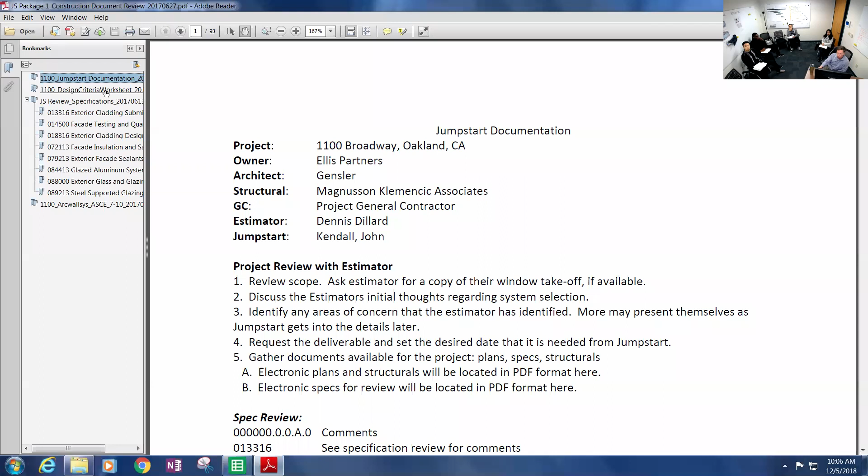And so again, as we look at, if I come back, I think this one I wanted to just go to contract. So again, this form that we fill out here, our design criteria worksheet, where we're coming in and filling this out. A lot of times these may be known or unknown. So I may not know the U factor. Sound transmittance, that's not going to be as critical for us in determining the wind load as is the wind speed, the risk category, exposure, live load deflection. And so let me see if I can find you an example of what RFI 1 looks like. What I might do is this.

Hmm. You have to excuse me for a second here, sorry. Should have had this all set up for me, but I didn't.

No, you know what? I apologize, guys. How do I get to that? Oh my gosh, this doesn't have sales on it. Why is that? Because not everybody has access to that, you see? Oh my gosh, it's terrible.

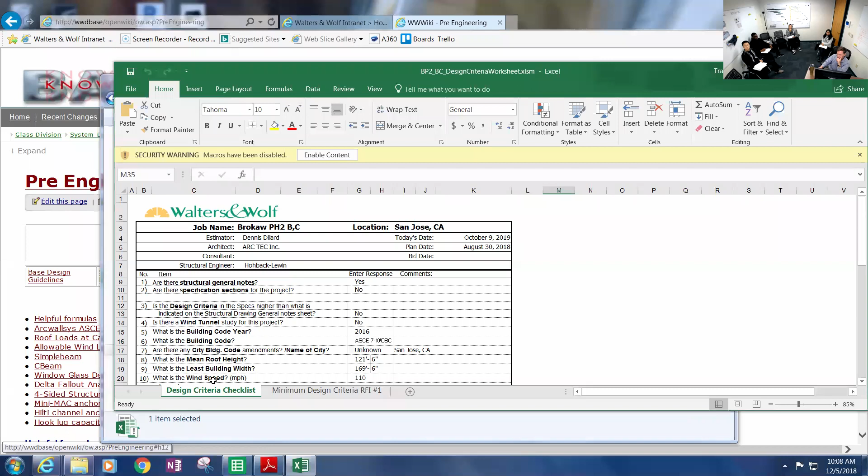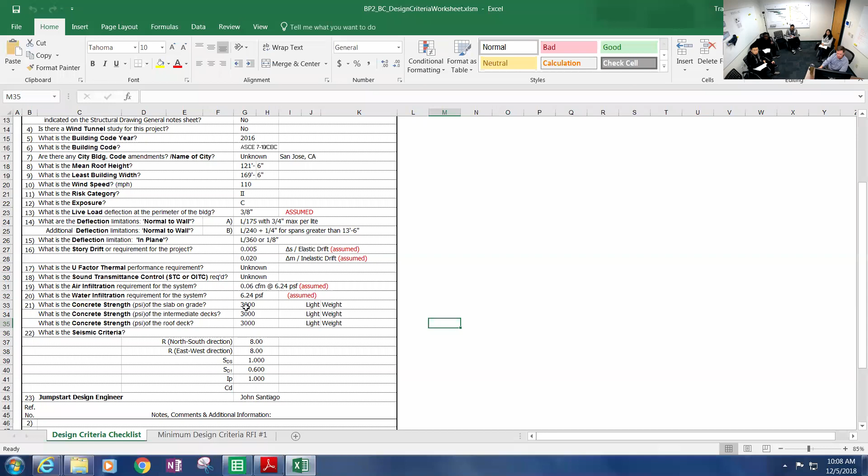So again, here's... I don't even know what that means. So filling these things out, we label things assumed if they're not on the structural general notes or specifications, if we can't find them. And another thing that's important to us is the concrete strength and the weight of the concrete, if it's normal weight or lightweight.

Normal weight is stronger. Lightweight actually has better fire protection floor to floor. So a lot of structural engineers and contractors prefer lightweight because it has better fire protection floor to floor. Something about whatever's in the concrete, but structurally, it's weaker when it comes to our embeds and things like that. So there's pluses and there's minuses. And they usually like their pluses and don't care about our minuses.

So what we've done is we've created a second page behind this where all that data we're filling in automatically fills in for us. And so this is what the minimum design criteria looks like. It's a confirmation, because we're basing all of our engineering and design on this information.

Years and years ago, before we started doing this, we would go through and do all our stuff. And then when we finally start doing calcs, it's like, oh, but the design criteria is different than what you guys thought. How silly is that? Stupid of us, really. So this is just our first RFI that the PM submits on every job.

So again, just confirming the design criteria: the wind speed, exposure, risk category, code, the deflections we're looking at, and some seismic criteria that our structural engineers use. We're trying to fill in what we know and leave blank what we don't know. So our assumptions, and then we hope they're filling this in and confirming what we're writing in there as well.

And then again, the weight of the concrete, the strength of the concrete for our embeds and anchorages, seismic drift, the drift movements the system's going to be seeing, and then the wind speed criteria. And this is just a little chart we made over here that sometimes we can use to help fill this in automatically, but it doesn't show up. So the actual PDF is just this sheet over here.

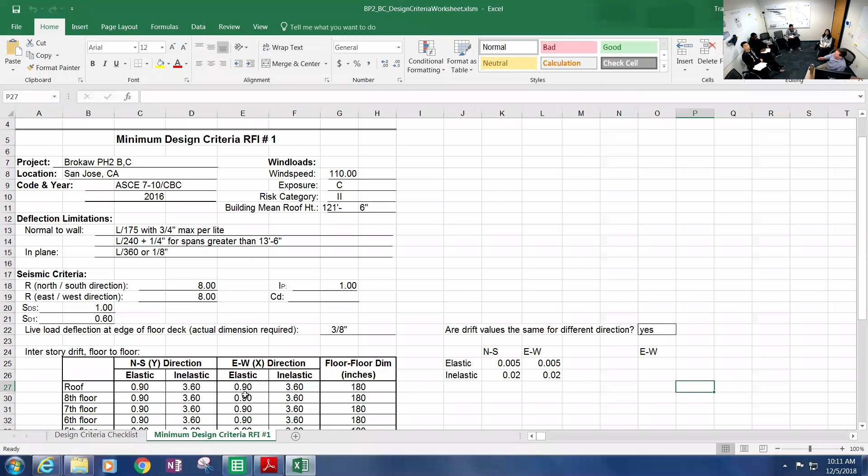Because to them, it's just a bunch of numbers. They'd just send it in blank if they could. But the challenge there is then we get back information that's really wrong. So it's, okay, here's the assumptions we made, confirm this is right or not, as opposed to just sending it in blank. Because for them, I sent it in, sure. But you're not helping anyone. You're hurting us if we don't ensure that.

So for Jumpstart, the timing is right after we get the job. It's a week, a couple of weeks, but it's before shop drawings. It's truly the very first thing that usually gets submitted. That's why we call it RFI 1. Typically, but depending on the PM schedule, it may be the third one they submit, or who knows.

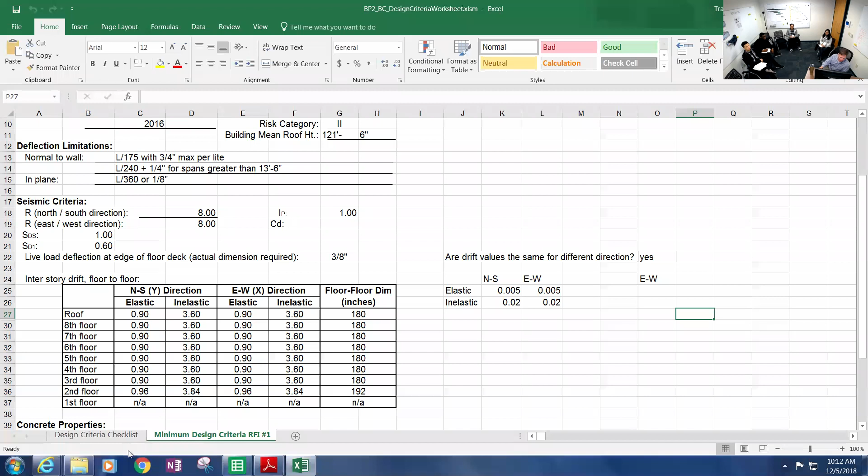So it could be RFI 3, but the title of RFI 3 is RFI number 1. So if we went over here to the portal, we can go in and look at the PM dashboard. Let's look at that. So if we go to RFI, it's right there.

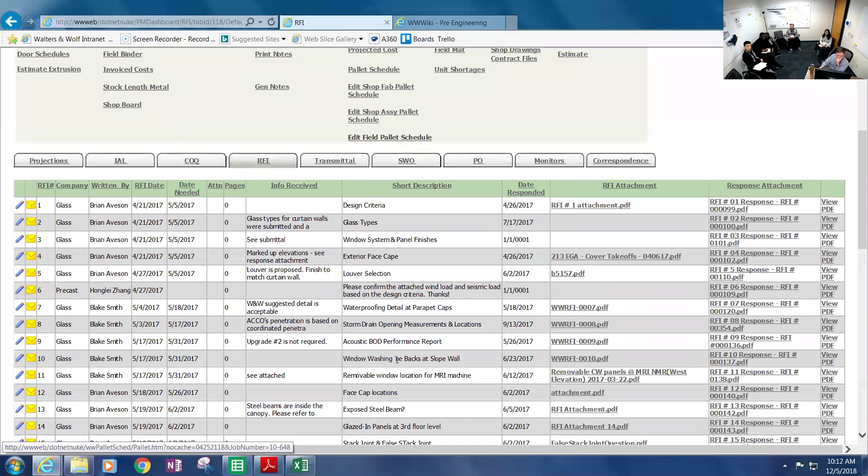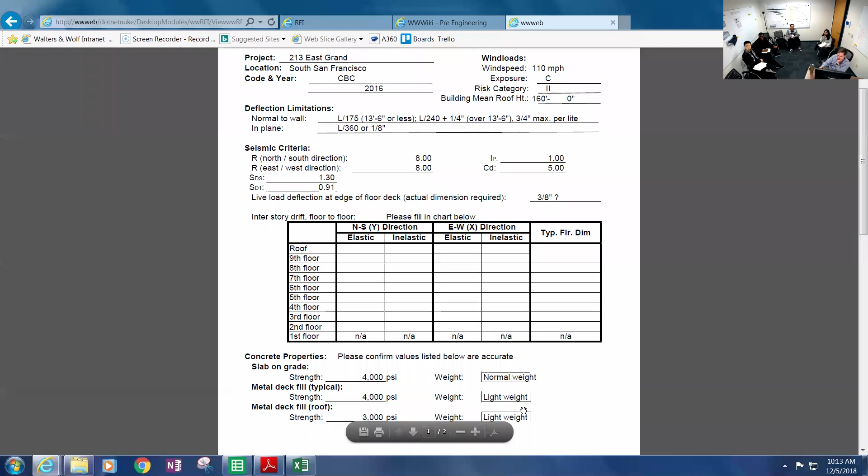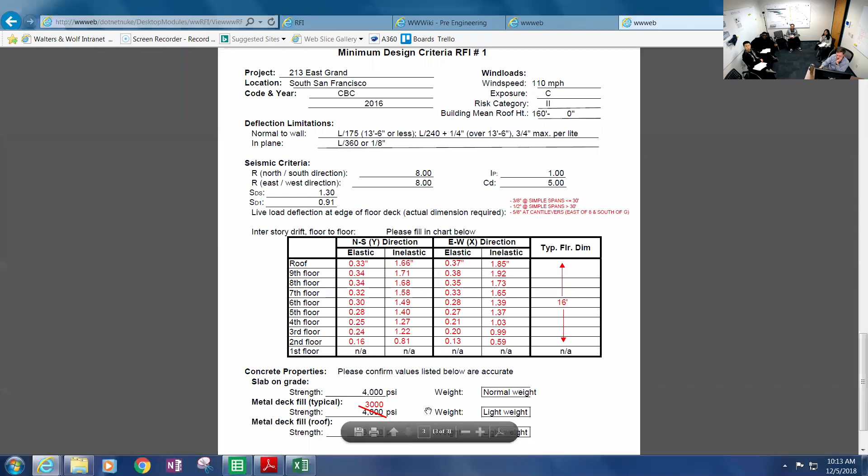And so if we go back here, let's see what the response came back. See how well we did. So they've given us all the seismic criteria. Oops, they said we had the strength of the concrete wrong at the intermediate floors. It looks like the weight was right. And then live load, they came back and defined, okay, there's actually multiple different live loads.

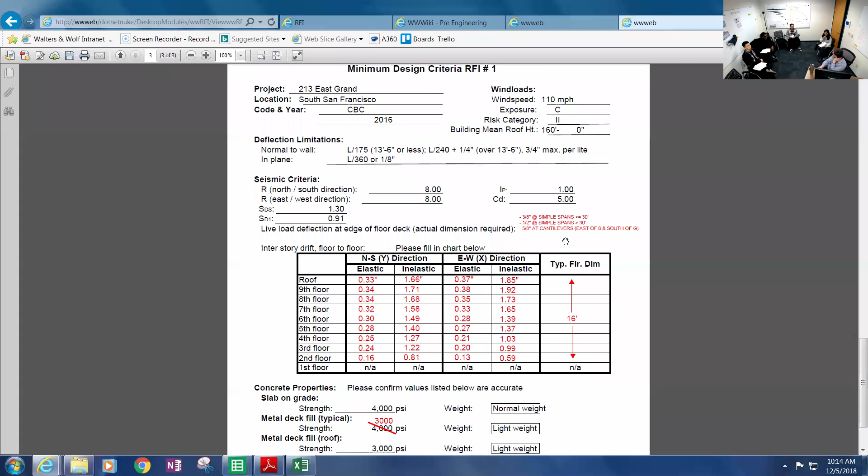And unfortunately for them, but fortunately for us, we just picked the worst. Because there's different parts and pieces, for us to try to combine and isolate certain parts and pieces for the live load, it's really our stack joint. We're just gonna use the same stack joint everywhere. And so we did have to create one for 5/8. So we designed for the worst case. Typically, yeah, in that case.

This is a good example. This is what we want. We want a response back, filling in all the blanks and correcting anything that we may have had. Exactly, it's a great example, because sometimes you go back and it's only halfway there, and then you see something else. It's like, oh, come on. All right. So that's design criteria, or RFI 1. Any questions on RFI 1?

So that's between Jumpstart and PM, right? Yeah, so the PM submits all RFIs, typically. If it's a sales time, the estimators will submit RFIs for pre-bid information. So it's either the estimator or the PMs that are typically the ones submitting those. Drafting doesn't really submit RFIs.

They may be involved as far as giving the details or the sketches to the PM, because it's usually the PM and the draftsman discussing that. Here's what I'm looking for, I can't find it. And the PM goes, okay, well, I can't see it either, so we'll have to do an RFI to get that information for you.

Okay, so the next thing was basic structural design. So since you're here, how high level or low level? Well, you could take 3 hours. No, 30 minutes, basic, just like a nice overview of, in the simplest terms, what do we design, how do we design, maybe even the I values. So how you come up with the shapes. Okay, so we touched on that a little bit yesterday.

On structural design, when we talked about package 2 in our pre-engineering, I opened up that pre-engineering package and showed you the results of the C-beam and the different things like that. You guys probably know more about engineering than I do, I'm guessing, I'm hoping. Well, not designing a curtain wall. Well, not designing the curtain wall, but as far as engineering, and knowing that

the size or the configuration of a shape affects its strength. So the deeper something is, or the wider, the more flanges. It's like I-beams, tubes, angles, just structural properties, right? So again, it's the section properties of shapes that we're looking at.

Wow, that was really slow. Oh, that's not good.

Oh my God. I forget those all the time too. I know.

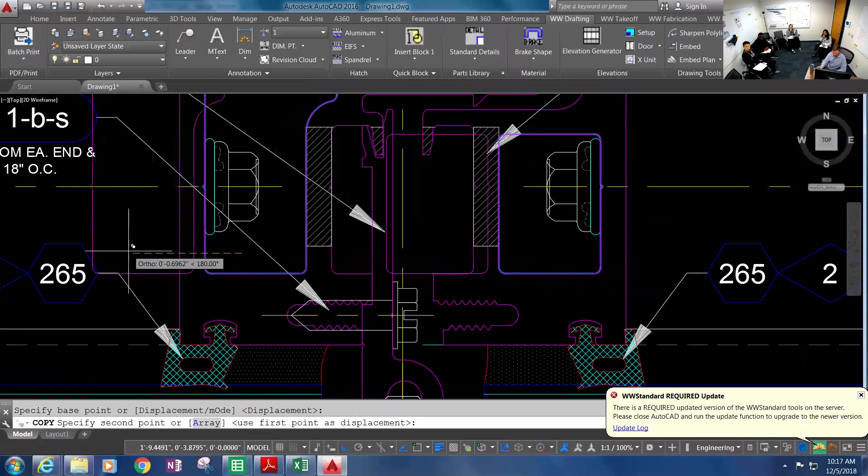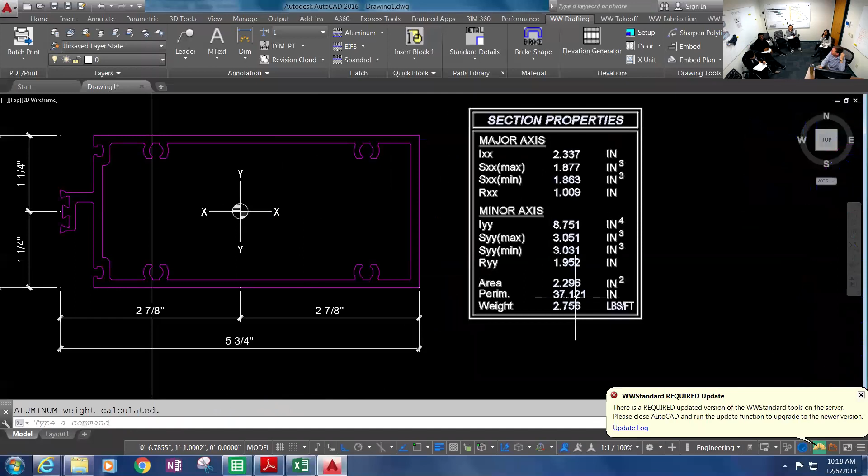So we've got a little tool that we created called SecProp that will give you the section properties of shapes. And so when we go to our engineering, that's really what we're looking at, right? Is the I values for deflection. And so in our split vertical mullions, it's additive. So we just add up the IXX here with the IXX here.

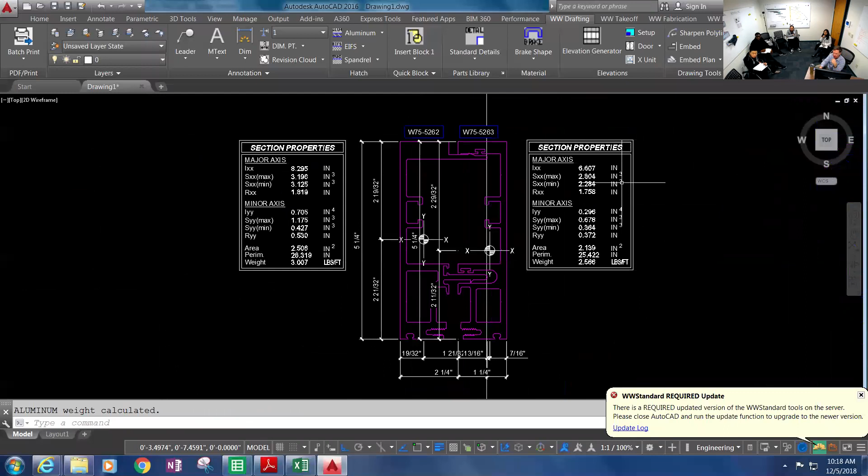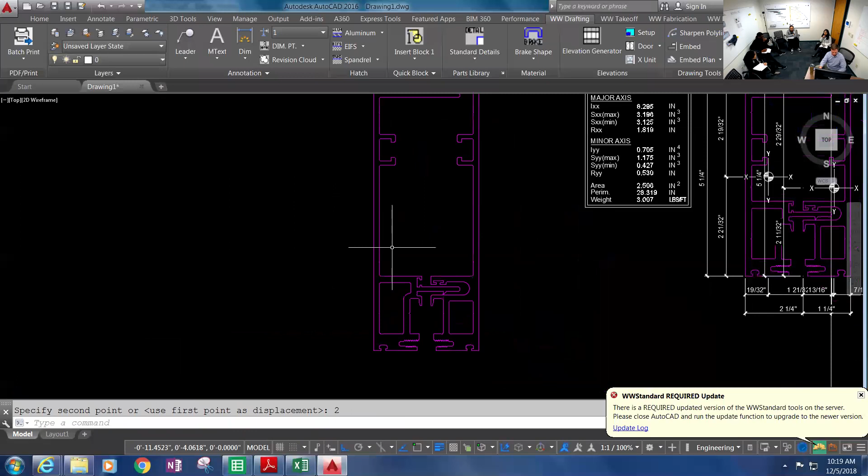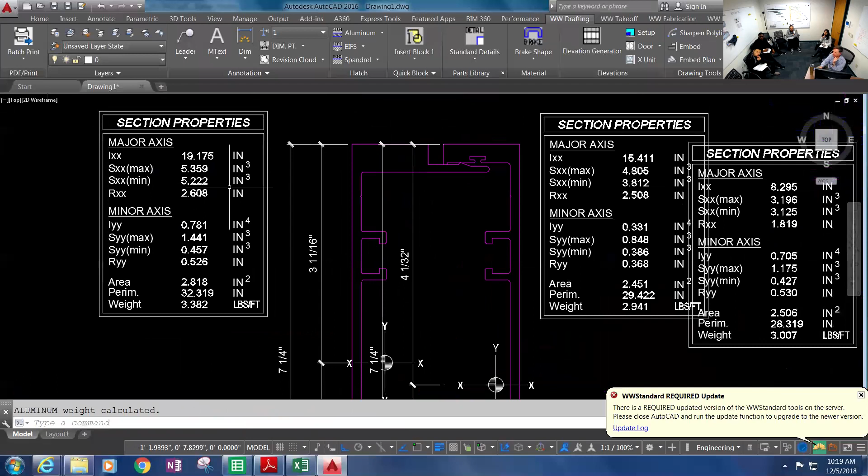And sort of like I mentioned, as the shapes get deeper, they get stronger, right? So if we have higher spans and things like that, just by making it 2 inches longer, the I value went from 8 to 19. So again, that's probably stuff you guys already know. The shape affects the properties or the strength.

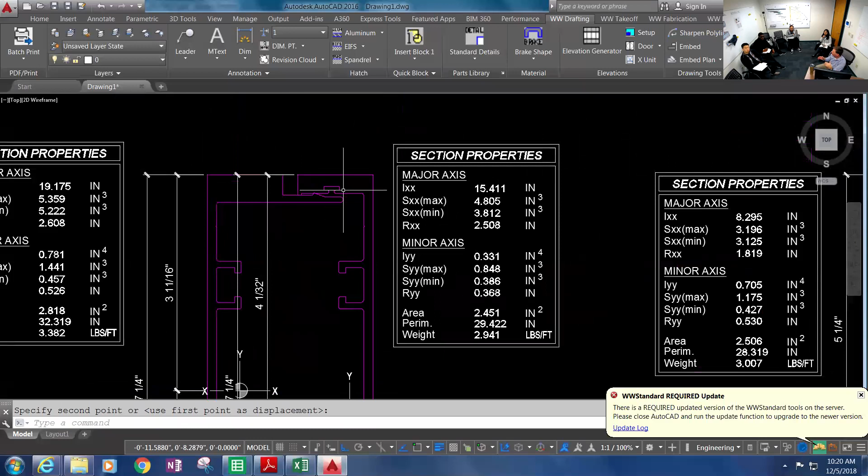Just like an I-beam, it's really the thicknesses of the ends of the element. So this area here and this area back here, getting thicker or thinner, and then getting them farther apart. And if I come in and try to add metal in here, which we've tried in the past, it doesn't really do us as much good in the middle of the shape. It's really at the outermost webs, and then getting them farther apart.

And so for vertical mullions, that's really just wind load deflection on the mullions that we're looking at. And then horizontally, we check for dead load deflection of the glass. Typically horizontals, maybe you're spanning 5 feet, maybe 6, 7, maybe even 10 feet if it gets really crazy. But mullions are typically 13 feet to 16 to 18 feet because you're going floor to floor. So your mullions are almost always what you're checking. We really never check horizontals for wind load.

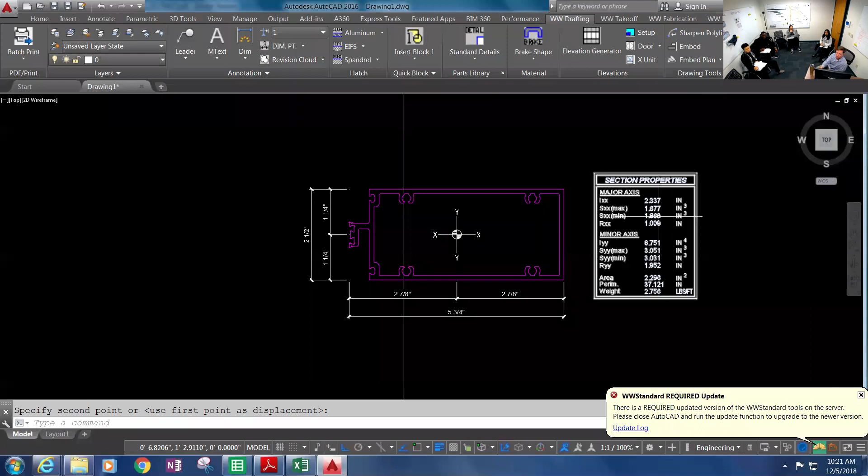What usually affects the horizontal the most is the dead load of the glass. As it gets wider, it wants to bow in the middle because the weight of the glass is at the quarter points. And so this smaller number in the horizontal is what we actually are checking for dead load. So in this horizontal it's the 2.337, not the 8.751. The 8.751 is the strength in the wind load.

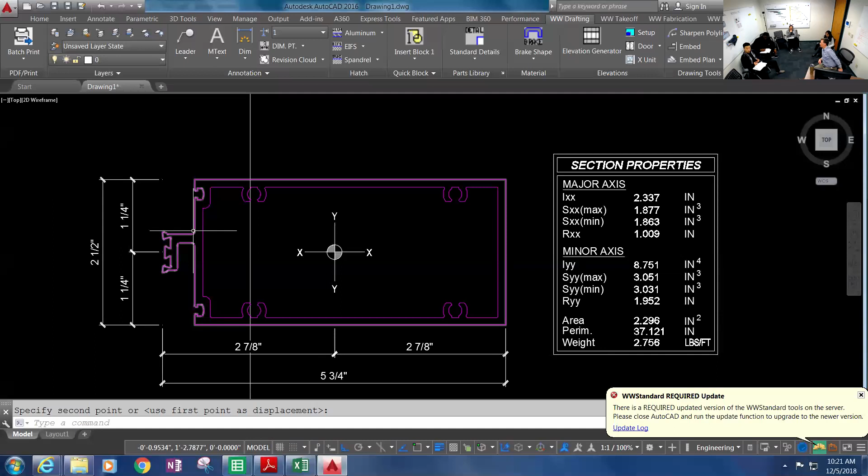And so, go ahead, Michael. I just had a quick question. What's the command you use to get the section properties? Okay, it's SecProp. So SecProp.

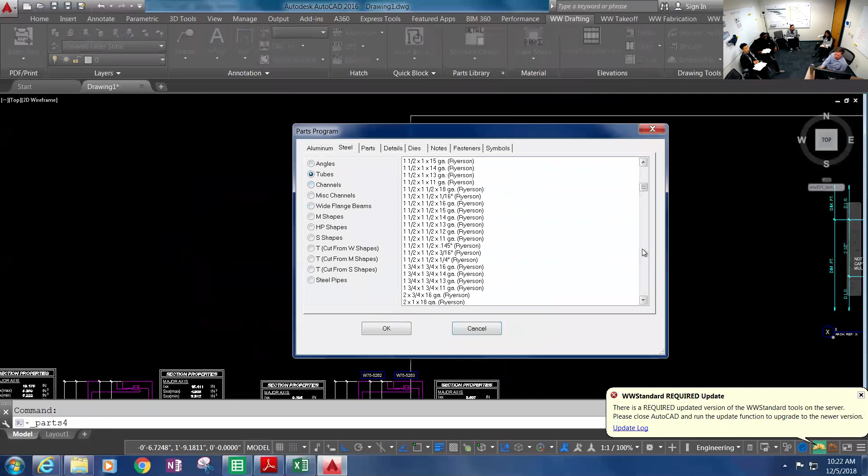Do you have a tool to check the horizontal deflection when you get wider? Yeah, there's an engineering tool that creates that, but I think Jumpstart's the only people that have it. But we do check that when you get to openings bigger than like 5-6 feet or something, right? Yes, correct.

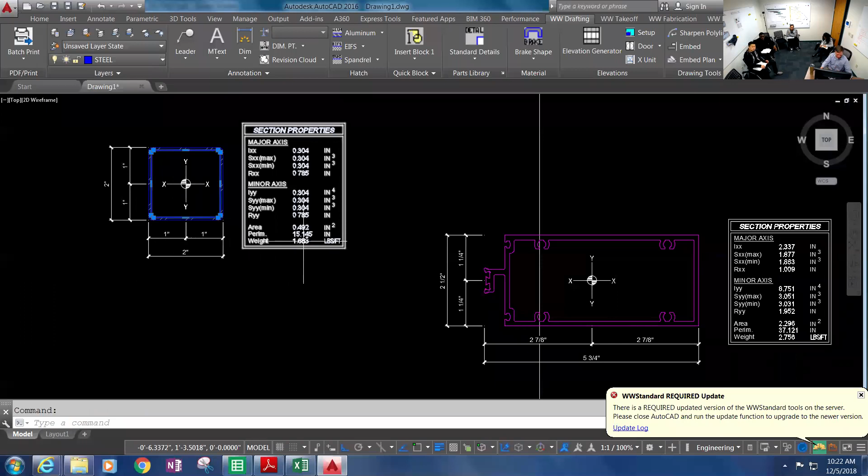And then just as an FYI, the section properties for aluminum or for steel are the same. This program is written so that depending on what layer it's on, if it's on the aluminum layer, it will give you the weight of aluminum. But if it's on the steel layer, which this one is, it will give you the weight of steel. Oh, I didn't know that. But it's only the weight that changes. The actual section properties are still the same. You just have to multiply the I value by 2.9.

And then one thing that we look at on the structural side of engineering is that steel is 2.9 times stronger than aluminum. So when we go to look at the reinforcing of vertical mullions, this I value here of .304, we get to multiply that by 2.9. So really what we're doing is bringing that I value up to its aluminum equivalent.

If the program did it the other way and understood that it's steel, it would be just this number. But if we're trying to convert it to aluminum, we would need to multiply by 2.9.

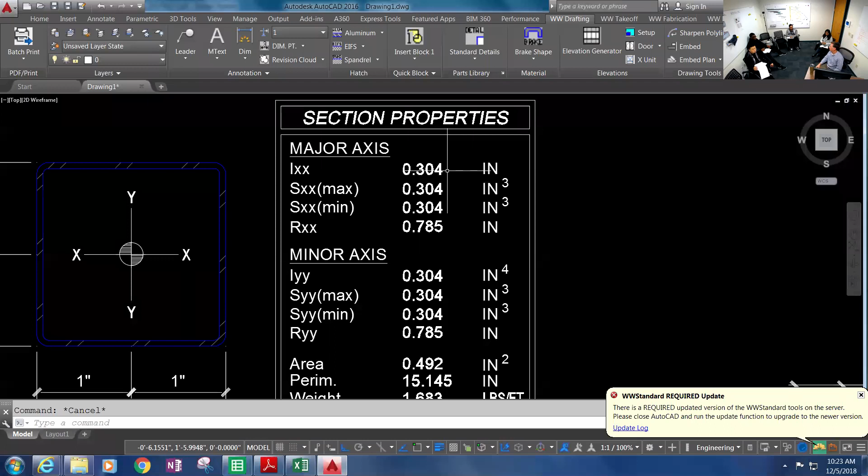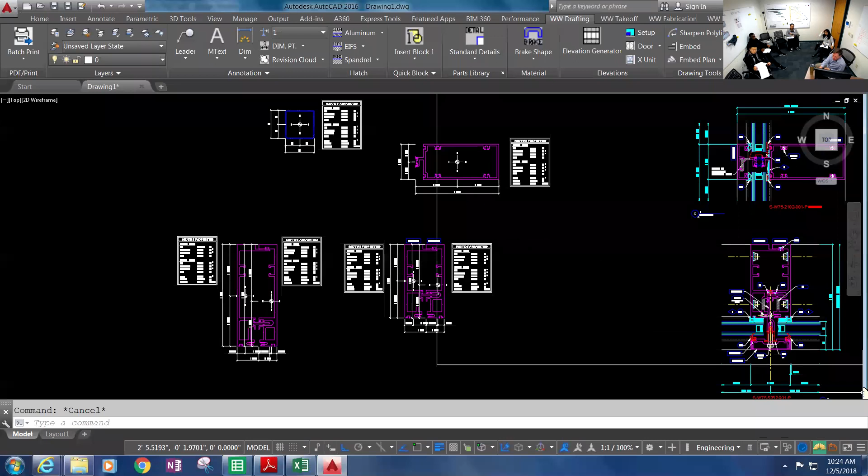Just to clarify the term reinforcing: like we said, if by chance structurally the mullion doesn't calculate, we add steel members inside to reinforce it, to try to help it meet that design criteria before having to stretch it and make it visually different than what the architect may have specified, right? Right. So stretching it is kind of like the last resort.

Yes. If the architect specified they want a 7.5 system, but it doesn't work structurally, then we have to start introducing deeper systems and other things. Yeah, and typically the reinforcing is localized, say the corner zones where the wind loads are higher. Like we talked about yesterday, the wind loads coming off the corner of the building, the little vortex it creates.

Or did we or no? Yeah, you did, when you were talking about package 2. Okay, good. Because I talked about it with someone else yesterday too, and I was drawing a sketch, and I go, "Was that with these guys? Was that with that other guy?" Because I can talk about it again if you need us to.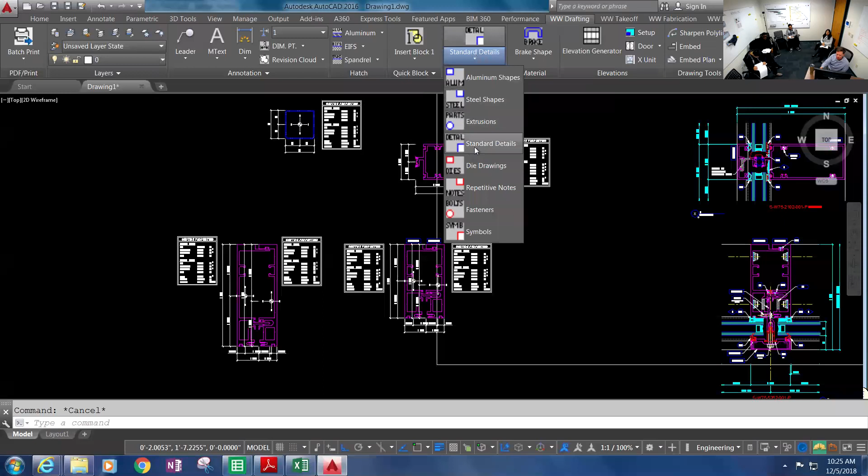Yeah, and so, as I mentioned with the standard detail for the reinforcing, we have some standard reinforcing that we like to use, just to make it easier for us. So there's a detail already drawn with the reinforcing in it. Typically we start off with a 3/4 inch thick by 2.5 inch steel bar, 10 foot long, centered in the span. If that doesn't work, our second one's 1.25 inches by 2.5.

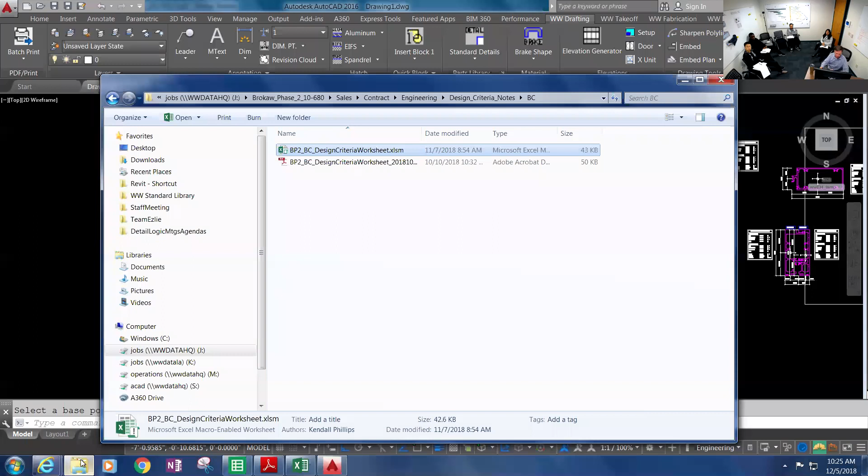If that doesn't work, we're sort of in trouble. I mean, I could get 1.5 inches, another 1/4 inch in there, which we've done before, but we really are trying to get those two to work when possible. And so we'll look at it again real quick too. But again, that's what we're checking in here, right?

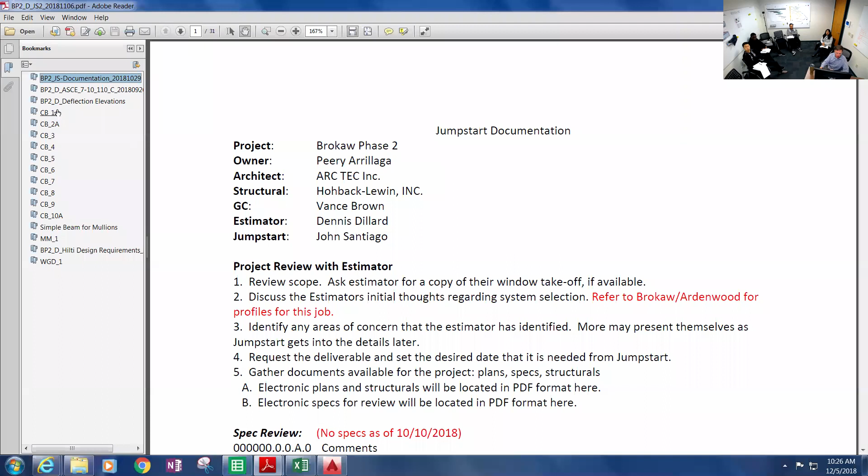So our deflection. I think we looked at 1100 Broadway yesterday, but this would be an example where we needed that steel bar at this location for reinforcing because it's a higher floor to floor at the ground floor. And as I mentioned yesterday, we don't just say here it is and leave it to the estimator or the draftsman to find it. We try to indicate it's needed in these 12 spots, and indicate it on here as well. And so that was CB10.

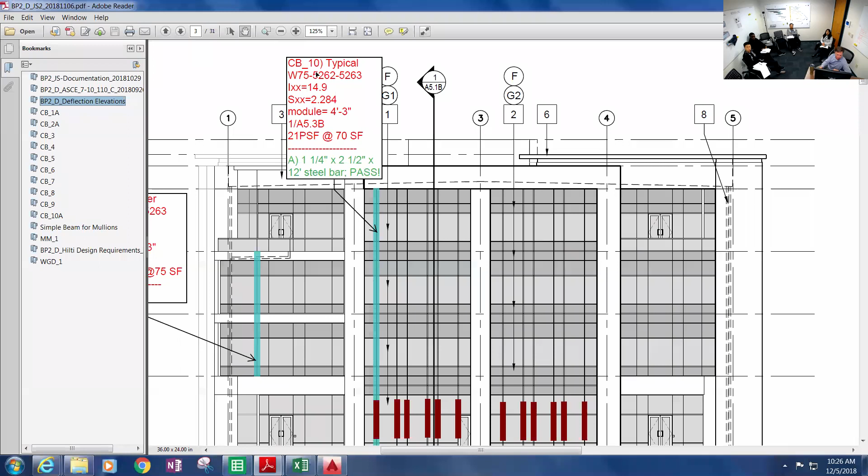And here is where we've added the reinforcing into our CB program, doing the analysis and figuring it out. And in these locations here, we had to add a kicker actually, so that's what these little round dots are. If we look at CB1A in the corner zones and even in the typical zone, how that looks is just another anchor symbol. So here's my typical ground floor anchor, floor anchor, floor anchor, floor anchor, and then this anchor here is 4 feet below the floor.

So a kicker is just another intermediate anchor to help with the deflection, because I couldn't get enough steel in the system to meet the deflection limitations. That's when we had to add the kicker. It's an option we can use sometimes when we have spandrel areas, even if it's vision. They don't like it in the vision. I don't like it in the vision because you see it.

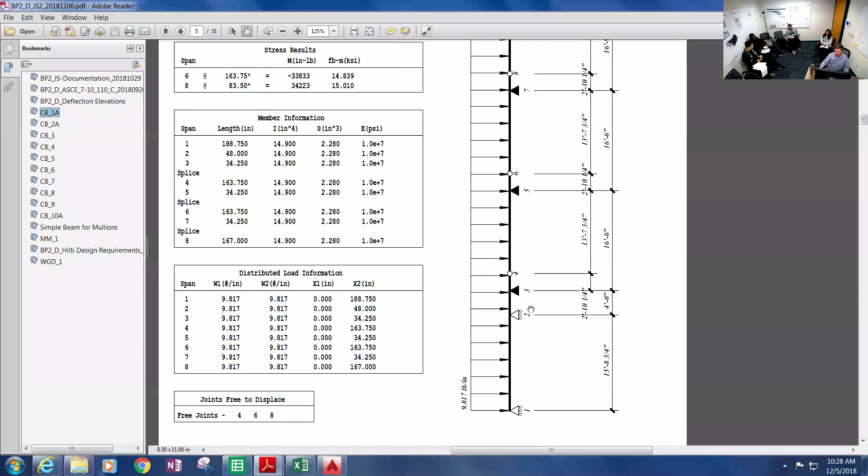But we don't know what type of anchor is required. We just know we need an additional anchor. At this point, yeah. So that's not designing the anchor, exactly. And again, this sheet gives the loads required at that anchor point as well, as far as the reactions.

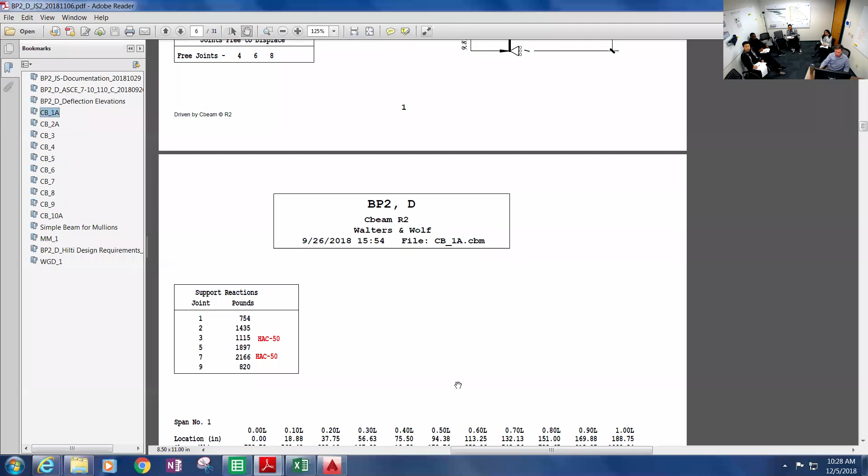It doesn't look like we did it here. As far as checking the horizontal deflection, typically for 5 foot or less, we're not going to have any issues with horizontal deflection from the dead load of the glass. It would have to be really tall lights of glass. And even then, once we put the setting blocks at quarter points, at 5 feet, you're pretty stout horizontally. So we don't usually check that if it's 5 feet or less.

Unless it was really tall, and even then, once we check it, it's like, yeah, okay, it's fine. So that's just sort of historical knowledge, I guess. But once we start getting wider than that, 6, 7 feet, we start seeing that deflection if it's really tall lights of glass. So.

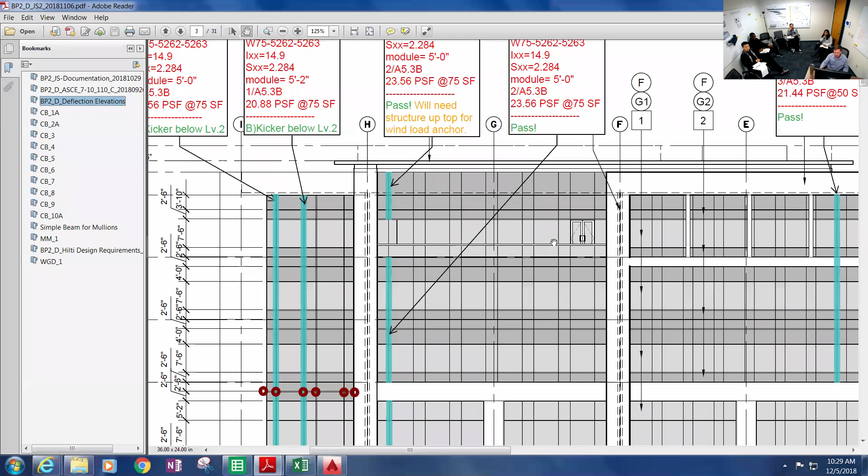Okay, let's see here. RainScreen. So the RainScreen principle, let's see if we can find some. The RainScreen principle has been around for a really long time, because essentially roofs are rain screens with shingles or siding where they overlap. And so again, you're screening the water away from the water line.

Like in my house, if I go in my garage or go up in the attic and I look through, I can see daylight. I can see little pinpricks and pinholes. So my little concrete tiles, they're not caulked together. They're not creating a water barrier where water can come through the holes. And so what the RainScreen principle is doing is it's trying to equalize the pressure from, let's say, outside of whatever the element is and the inside of the element.

Because water goes where air goes, and the air moves from high pressure to low pressure, right? And so typically, the pressure on the outside of the building, did I say it right? Where's your low to high? But it's high. Air moves through our system, right? And so as the air is moving through, if you put water on it, that's where the water's going to go also.

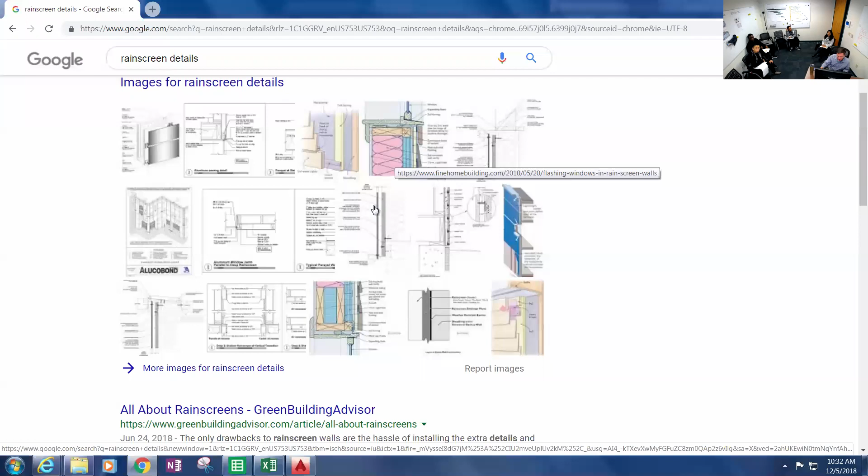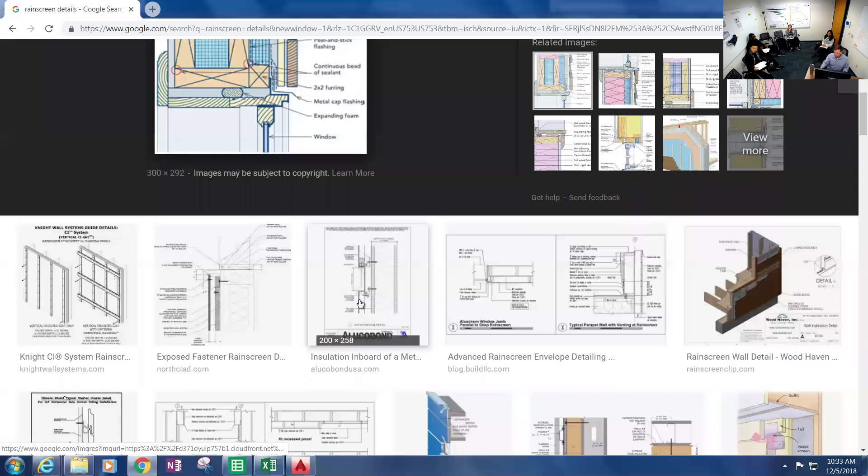Let's see if we can find it. Oh, that's not a bad example, but let's see. Might even just go to our shop drawings and find an example. But there's one right there. Let's see. Is it gonna let me look at that?

So this example here of this stone or terracotta tile right here, actually this is wood, but you can imagine that's any other material. So on this back line of the sheet of the gypboard would be an air or water membrane. And so the water line of the building is back here, let's say. So this surface, this is air, right?

This air pressure in here and this air pressure out here is the same, because these little clips are just maybe 2 inches long every so often. So air is free to circulate in and around those shapes and through those shapes. So I've got no pressure differential behind and in front of that. So any water that hits this, instead of wanting to be sucked through, it just wants to drain off, because there's no air pressure trying to pull the water through.

And so then the same thing can be applied to curtain walls. It can be applied to any system, right? So here what you're doing is any air pressure here, it's the same. So water just wants to drain down. Incidental moisture in the air and things like that may come in here, and that's where the vapor barrier in the back prevents that from coming in.

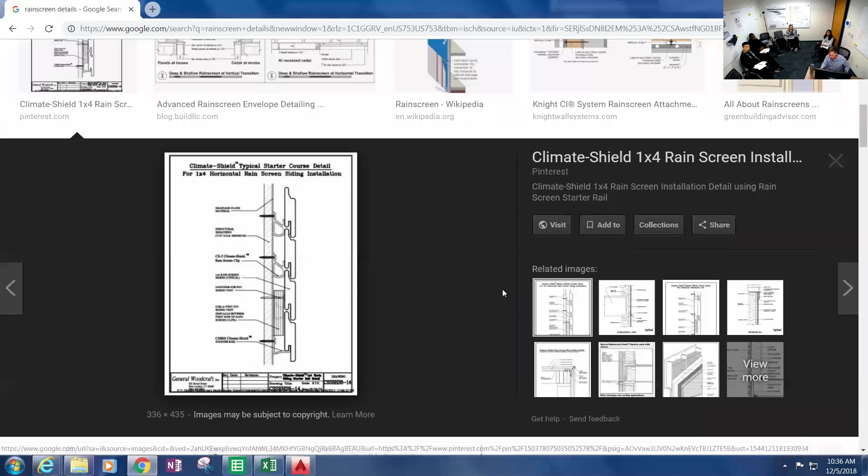And then this material can be anything. So like in this example, this is a wood siding, I'm guessing because it says woodcraft down here. But this could be metal panels, it could be terracotta tile, which is a type of brick or clay that comes in a siding thing like this. It could be almost any element that you want. It could be metal, just overlapping, things like that. What we're tending to see, let's look at this one right here, maybe.

And Ezzy, I don't know if I'm going too deep or too shallow. Ezzy's going, shut up, Kendall, and talk about something else. This is all good stuff, though. No, it's good. Let me, what I'm going to do, I'm going to go back here.

So the reason to understand this, too, is most people just think the exterior thing you see on the building, that's where you're stopping the water. But as we just saw, we're allowing, so to speak, water within that detail we looked at, maybe 1.5 inches, it's open. So like I said, the water line is really that barrier. So when we are working out our details later, we'll see where's the water line, which is where we need to actually stop the water, where we need to seal and put the sealant.

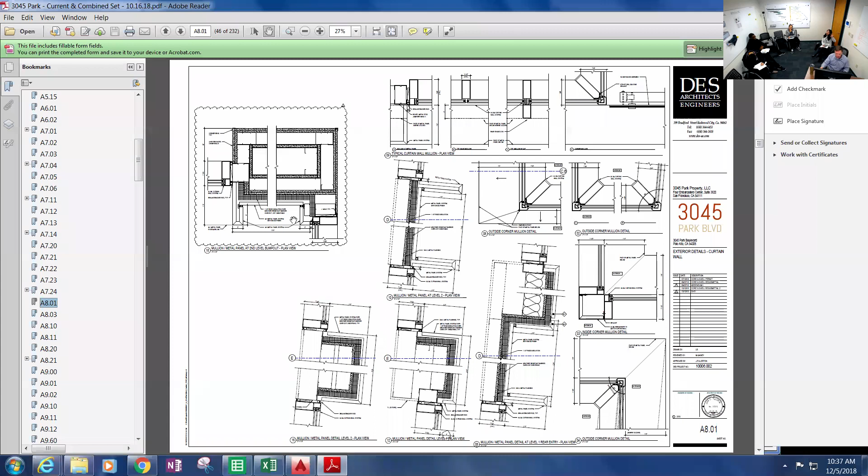We can allow water in a certain space, as Ken will show you in our details, where we allow water to go, and air, but where we have to stop it, there is a point. So it just kind of ties into understanding. You don't need to know every other substrate's details, but it's one of those questions as we're detailing: what's the water line of that system that we're butting up to? It's not always the same. Terracotta, stone, precast, they all have different water lines. So it's just good to understand their stuff enough to know where we need to stop the water and then understand our water lines in the curtain wall.

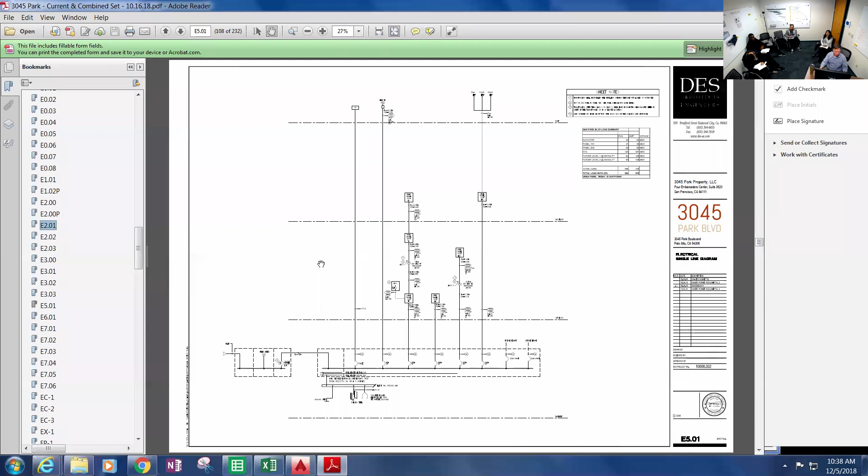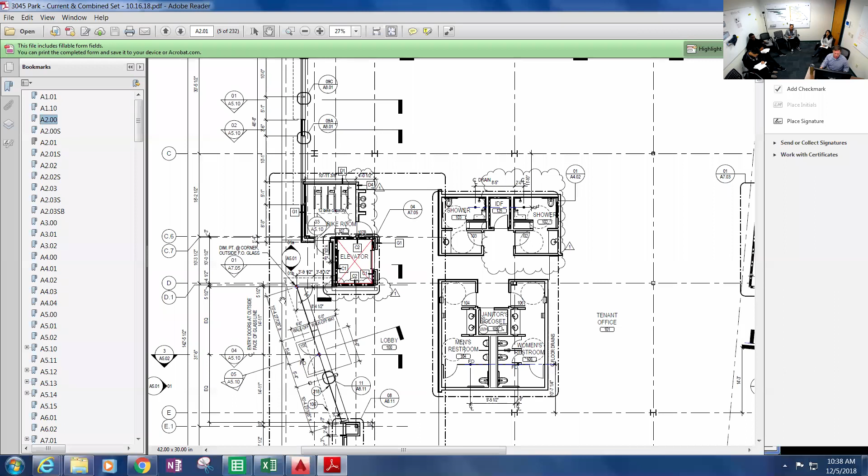Right. Yeah, and so one of the current jobs, well, a lot of the jobs have this, but one specifically is 3045 Park. And so this detail here is a vertical cut through. Let me just show the elevation first. Electrical, how did I get to the electrical? So this is the plan view, and what we're gonna be looking at is a detail of a column. It's gonna be similar to this little vertical column cover here, and then elevation.

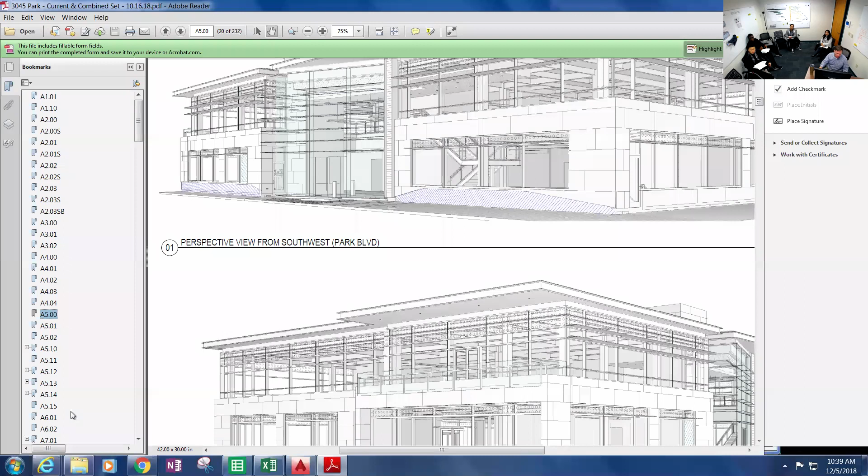Oh, that would have been a good sheet, yeah. So this is all metal panel right here, and here's our little windows, and these metal panels are a RainScreen panel system. So again, the water's hitting it, shedding off, but it's not the true water line of the building. The water line of the building's behind it. And if I can find my detail again.

So then looking at a plan view of that. So we've got a window. A little bit, please. Thank you. Yeah, that's good. I've got a window. Here, get rid of this.

It's all right. It's all okay.

Right. So again, I've got a window system over here. Here's my glass inside. Here's my window over here, my glass. So this is an open joint panel system. And the actual water line is this hidden line back here. This little hidden line here. So this is the water vapor barrier.

And so this started in Europe actually before it got to us, and then it was really on the East Coast before it even got out to here, because it never rains in California. Well, it's raining now, but it doesn't rain. It's not like the East Coast, and it's not like Europe. And in the Bay Area especially, we don't have quite the swings in temperature that the East Coast has and even Europe.

So the Europeans, and now we do, this crosshatch thing here is insulation. So they'll actually come in, they put down the water line, and then they cover that with insulation. So they've sort of got a secondary element shielding water from getting back to the actual water line itself.

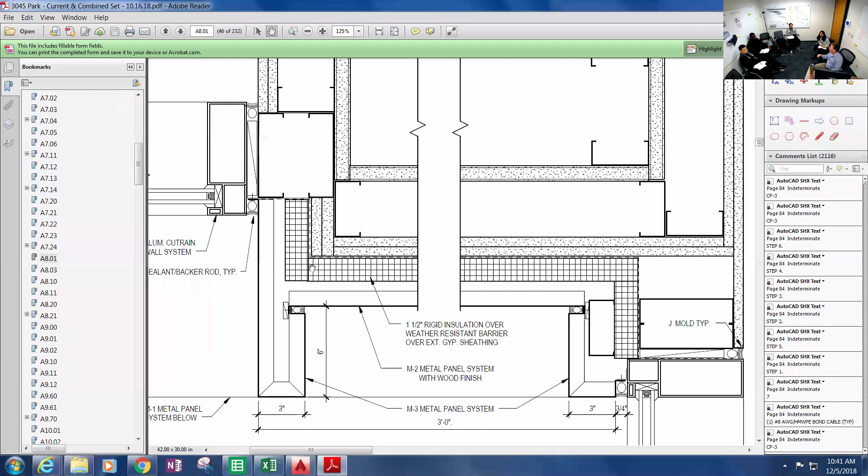Because a lot of times the architect will want us to go ahead and caulk it up. And it's like, you could, but now you're trapping water, you're making a fish bowl. Yeah, they show the caulking there, they're not showing it as open joint. So just something to be aware of as you're looking at the details, if it's open joint or if it's not open joint.

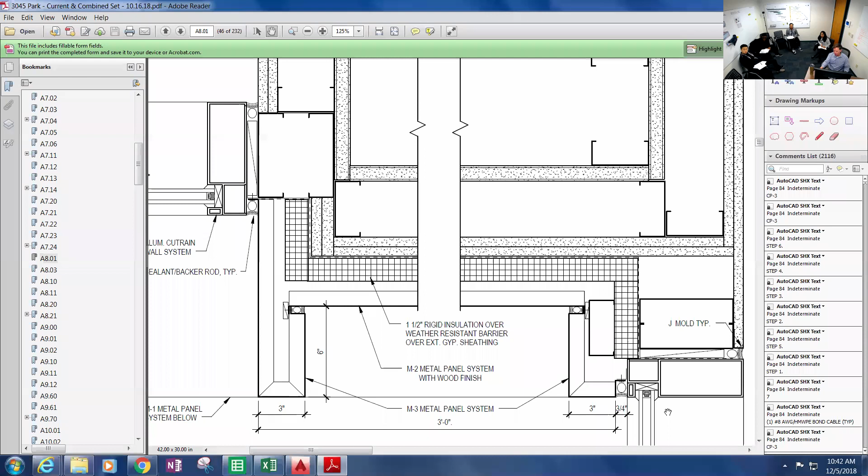And as we mentioned here, the importance of knowing this is, if this is the true water line, that hidden line, then my window system needs to caulk to that. So right now, they don't have us caulking to that. They've got us caulking out here in the face, which is not the water line. It could be if they wanted a face sealed system, then we could caulk out there and that'd be fine.

So in the proposal details, hopefully we're catching this and drawing, okay, there needs to be a little piece of flashing here for us to caulk to, even though the architect didn't show it. So for us, we need to understand how we're caulking our system. We could still put the sealant where they show it, and that would just be called a beauty seal. It's just for looks. That's not really waterproofing the system. The one behind that's gonna be hidden is really the water line caulking the system.

And the other aspect is that typically that waterline product is not silicone compatible, and all of our sealants are silicone. So we'll either have to put a piece of metal flashing or maybe a piece of foil face tape. It looks like a roll of duct tape, but it's got a thin layer of aluminum foil coated to it. That tape will adhere to the plastic material, and then we can caulk to the aluminum foil, because silicone will adhere to aluminum.

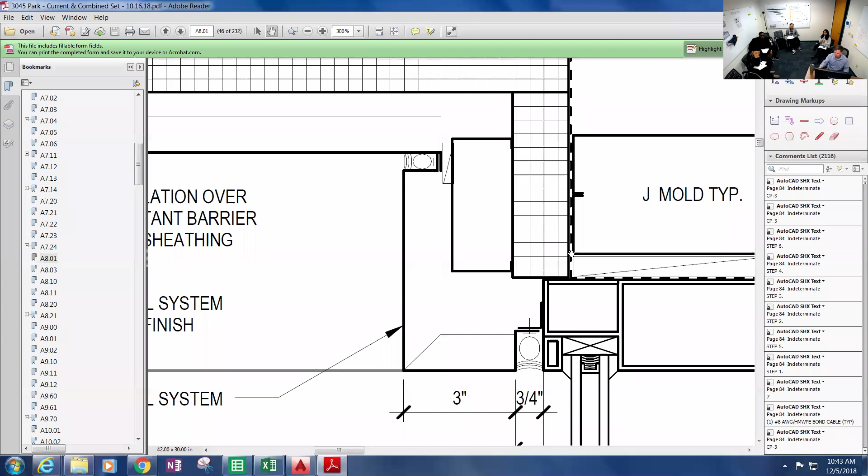And I'm just going to give you a disclaimer real quick. I may be off base. 3045 may actually be a face sealed system, so if you see details and you go, that's not a RainScreen, it could be. If I just removed all those joints, then the water line would be back there. So I think it is. We've got the drawings, I just forget. But it still would apply.

Yeah, exactly. We still need to caulk to the water line. And the way it's detailed, they're still making it clear that the panel is not the water line. But hopefully in our RainScreen discussion, or that you were hoping I was going to do.

Yeah. In a RainScreen system, that's the water line. And then right there, we would have to come in to that and add our piece of foil face tape right here. And then to that, we could caulk. And then we could add a little piece of caulking right there with some backer rod. Little backer rod.

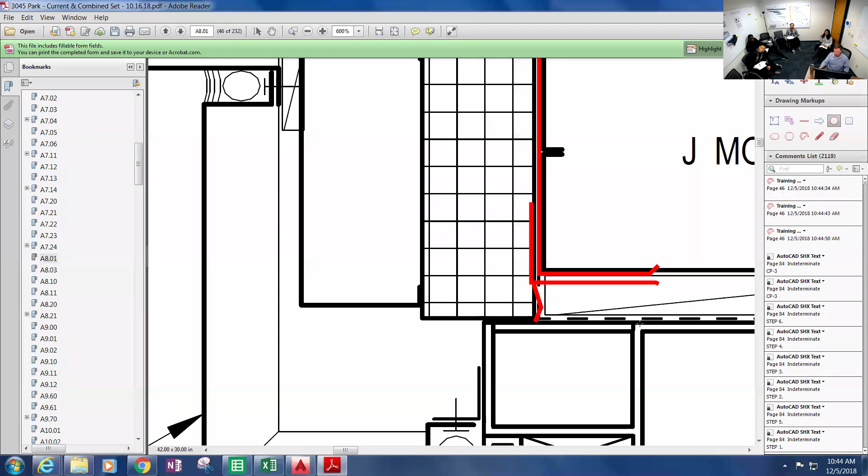Man, Kendall, don't be impatient. And then do the same. I'm going, hey, this thing should just be instant, and do the same thing over here.

And then, as you mentioned, if the architect wants a beauty seal. But again, one of the things to be careful of too is if it is truly a RainScreen system, they can't have a lot of beauty seals, because again, I need that air flow to dry the insulation back out.

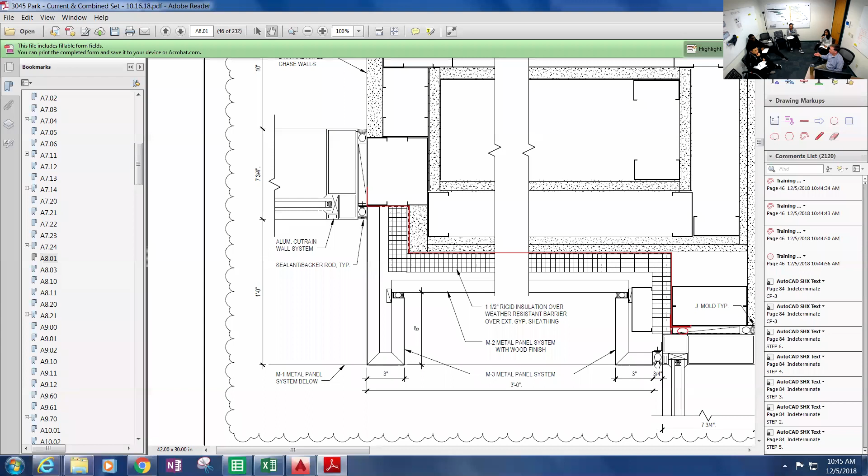So that's one of the areas where, when it came to the US probably the first time, especially with the product called EIFS, which we call EPhus, but it stands for Exterior Insulation Finishing Systems. And one of the biggest issues they were having with it wasn't that the product wasn't good, it was their installation was wrong, because they weren't installing it in such a way that the insulation could dry back out. They were putting it right on, so the insulation would get wet, and then you'd end up getting mold years later. So they thought it was a defect with the product.

And so the industry really hurt themselves by not going out and ensuring that people knew how to do it correctly. They just saw it was something in Europe. Oh yeah, I can do that, and anybody could do it because it's not hard. But there is a right way and a wrong way to do it. And so we don't see a lot of EIFS out here anymore. We never have really seen a lot, a little bit. Essentially EIFS is almost the same as plaster, but you're really just putting the plaster coat right on a piece of foam insulation, so the insulation's out there. Won't get too deep into that yet.

Can get into our system, we have 15 more minutes, so maybe. I apologize. No, it's okay, I just wanna touch on, so then show how our system is pressure equalized, that would be good.

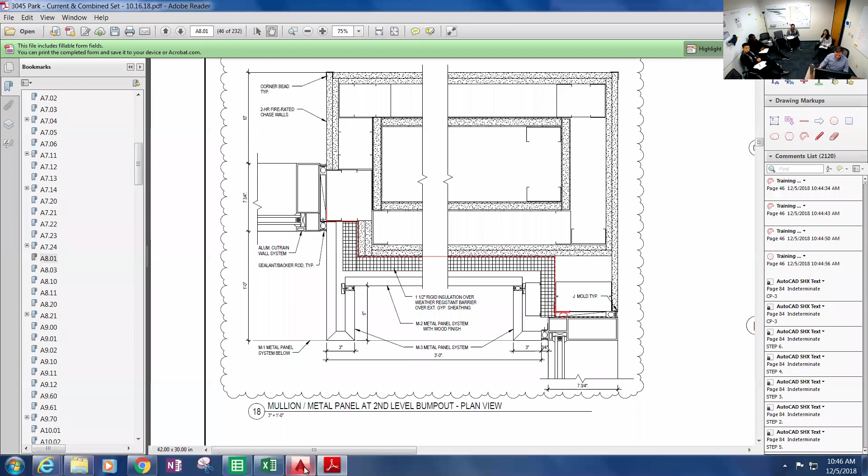So then for us, in our Windows system, Amber, okay, can everybody see that, or is that hard? Is that better or worse? I find it worse. I like it black. Guys? Yeah, Amber likes the black screen. Well, sometimes on a projector I actually like the white. But your screen looks good, I think. Amber's looks fine?

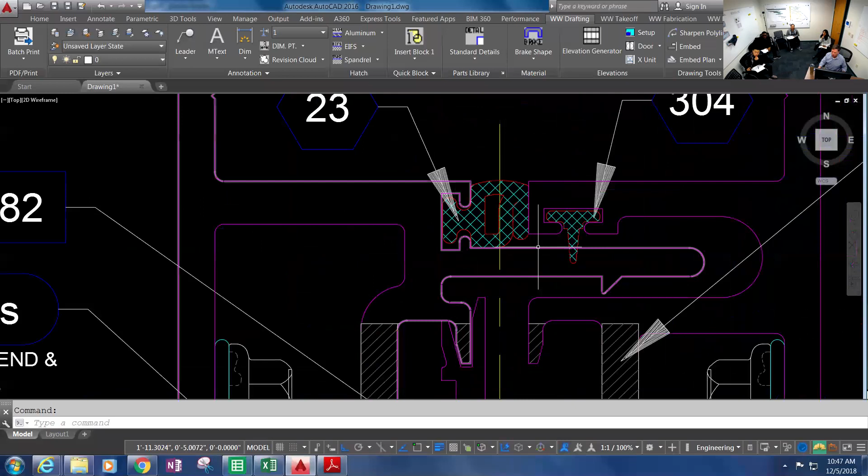Okay. So for us, in our system, our vertical mullions, this gasket here is our air and water line. And so typically on our drawings for vertical mullions, outside is almost always to the bottom of the sheet, outside the building, and inside's on the top of the sheet. And then on our horizontal elements, outside is to the left, inside is to the right.

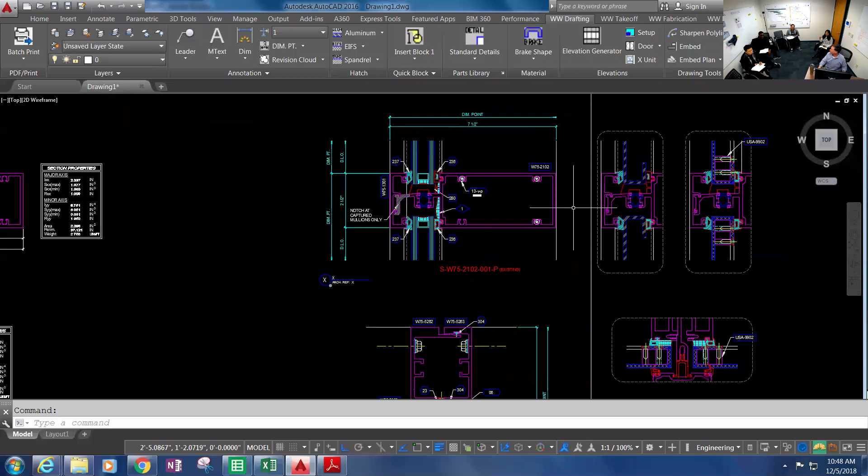Architects do it almost opposite. Yeah, I told them that day one, I'm like, here you go. Architects like it the other way. So you go, how come our systems are all backwards? They're not. Whether they changed or we changed, we've always drawn it this way, and I don't know why. And maybe architects have always been the other, but that's just sort of.

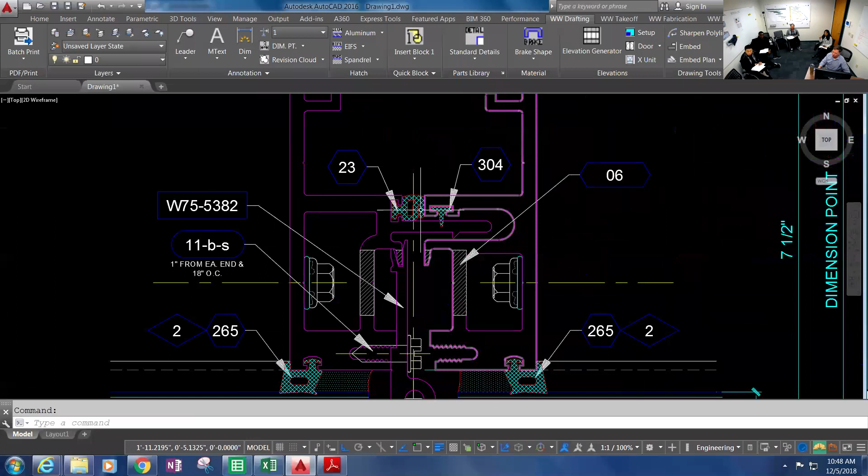So as we look at our vertical mullion, this line right here is our air and water barrier. So this gasket right here, that's where I can't have water getting through. Water comes through that, I'm in trouble. So I've got a little wiper gasket here. And so as we talk about RainScreen and pressure equalization, the pressure equalization was what we talked about, like with the tiles, right?

The pressure behind it is the same, so it's got enough open area and airflow. So we're trying to build the same thing into our system: we put these covers and things on here, but my air and water, my final air lines, are back here. So how we get the pressure in these cavities to be the same as the pressure outside is in our stack joint: we are open on the bottom. So did I bring that detail in?

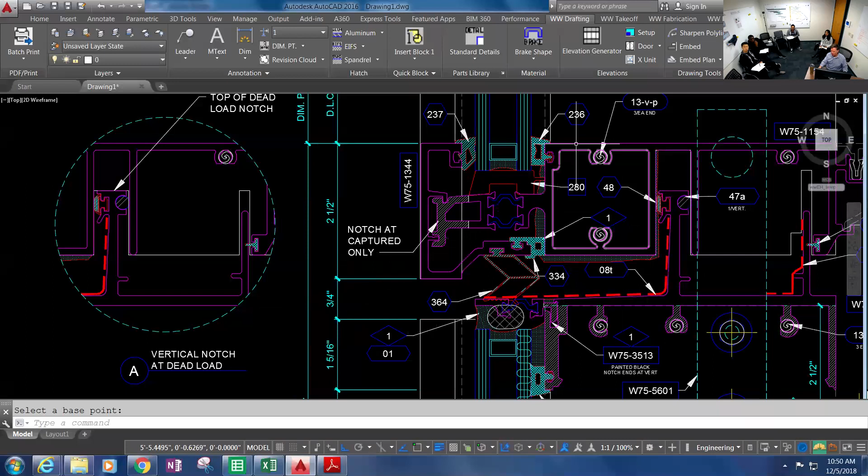Is that our stack joint? So here's that same line, that's our air and water gasket here. That vertical gasket that we saw in the detail is coming down here, and it actually crosses and touches that gasket. But the bottom of our vertical mullion is completely open. So we're shielding a little bit with this gasket to keep wind-driven rain from getting in, but we're allowing air to come up inside. So we're trying to keep the pressure in this area and in this area the same as the exterior area.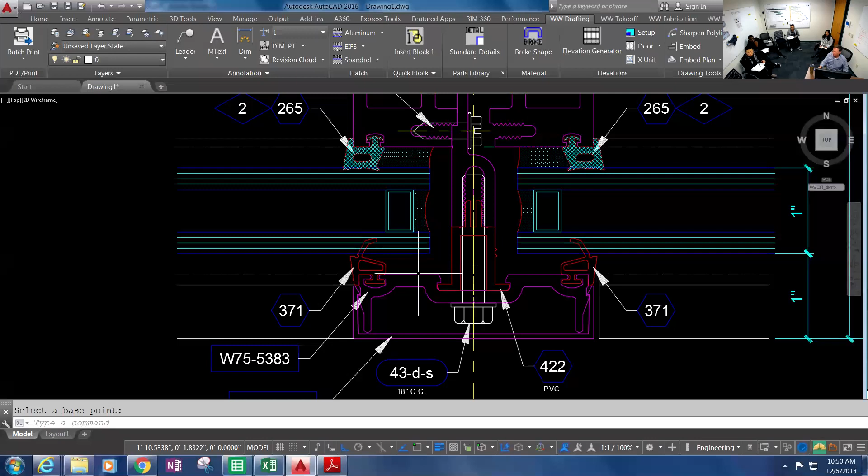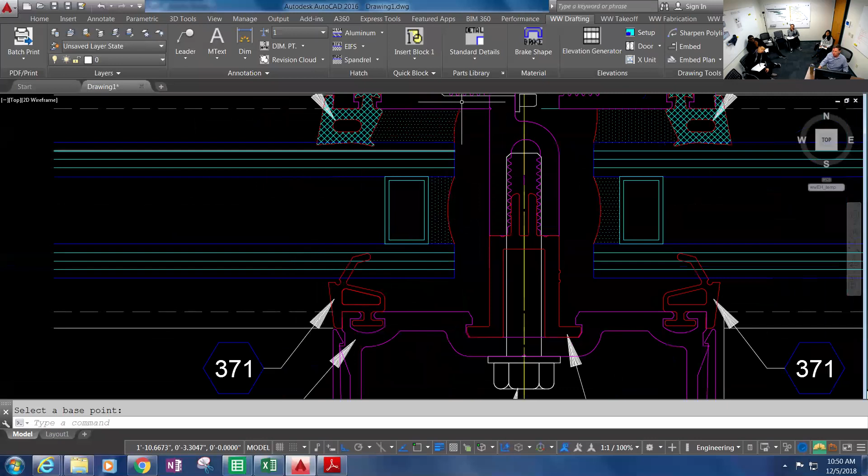So now I don't have an air pressure differential across this gasket. If the air is not trying to pull through there, I'm not trying to pull water through it. We do have a pressure differential here, but that's a wet seal joint, and I'm not going to have any issues with sealant. It's really with gaskets: air trying to get through the gaskets, how tight the fit is, and any joints in the gasket. So while I could have air trying to get through here at a sealant joint, you're not really going to have any air or moisture. There's just no possibility for that. So that helps explain why we only seal in the back. It's also structural, to hold the glass.

So that 371 gasket is really more just aesthetic. It's more for looks and to block direct air and water, to prevent wind-driven rain. But it's not really a performance seal, so it's more for the look and install, not so much the air. The ones in the back, 23 and 304, are doing more of the water.

So air pressure in here, inside, is the same as air pressure out here. I don't have any airflow, and with no airflow, I don't have any water. So when we do our performance test, we're spraying water on it, 5 gallons per however many feet per minute, it's a lot of water. So again, we're trying to keep that off of that gasket. And so I'm shingling it down, so moisture is in this area, vapor in the air, because air is coming up from the bottom.

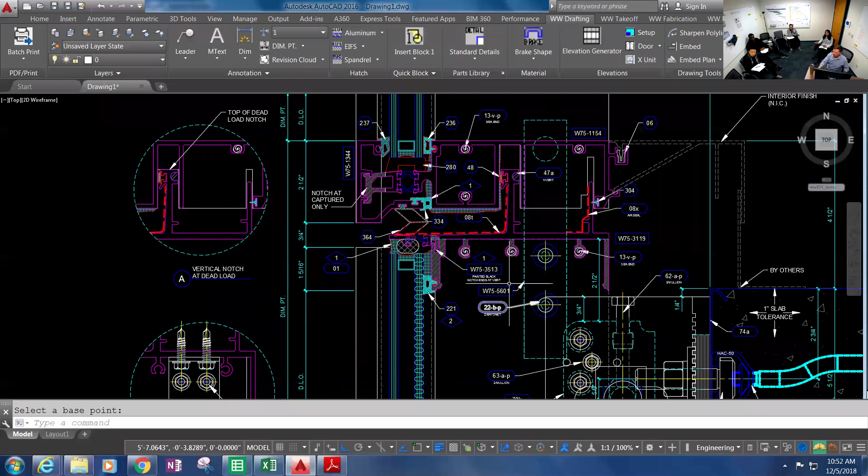And as the air comes up, we actually stop it at the head. Air can come in this way and come up, but at the top, so imagine this bottom part is up at the top of this other one, we do close it off. So it's not circulating air, but it is the same pressure. And here at the head, we put a silicone sleeve to cover that up in the field, because air and water can get in here as well.

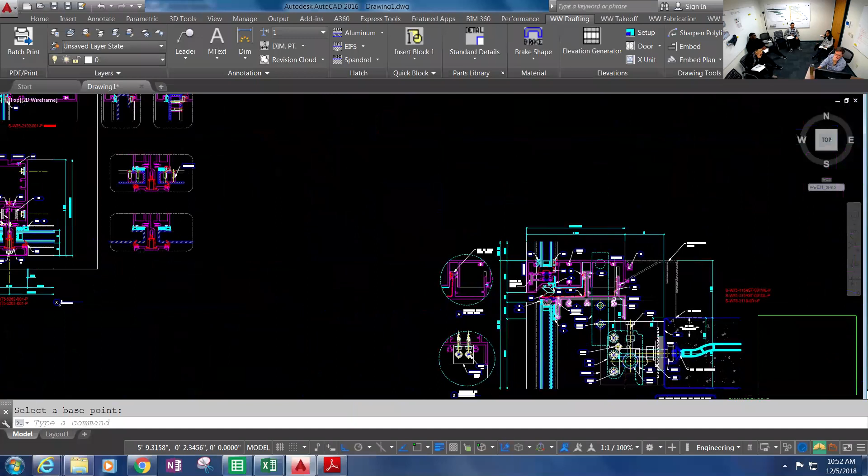So some people refer to that front area in front of the chicken head as a wet area, because we are allowing water to get there, and that's okay, so to speak. But the area behind the chicken head we call the dry area. That's where you absolutely cannot have any water go beyond the chicken head. And this is the chicken head, in case you're curious, this little crazy looking thing. Did you learn that terminology a little bit?

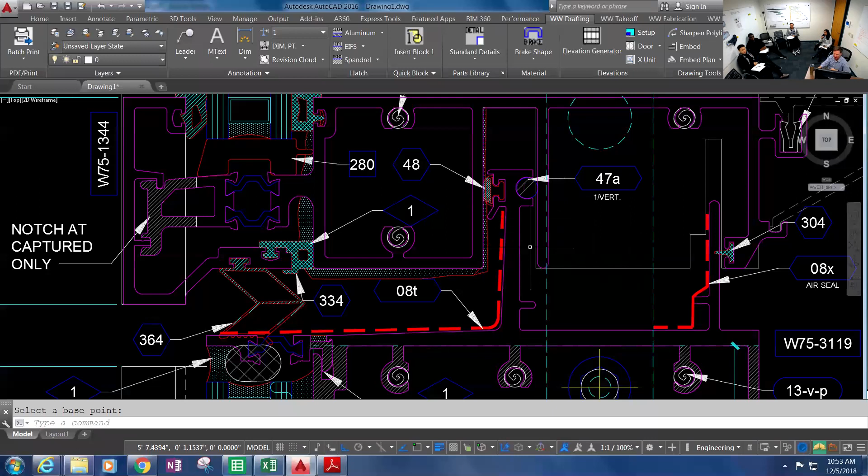Yeah, why do they call it chicken head? Because the way it looks, a little rooster thingamajigger or something. Oh, okay. It may not really look like it. It's just the term people use. We got architects saying it now, so there's no going back. Once your customers are saying it, once they understand it and know what it is, keep it. Right, exactly.

Yeah, so I'm dry back in here, so I don't account for any water being back in here. We're not planning for allowing water in here. If there's water back here, we've got a leak and we need to fix it. It's a QC issue, probably in the field or something. Same thing here, this is the dry area back here. Not expecting any air or water.

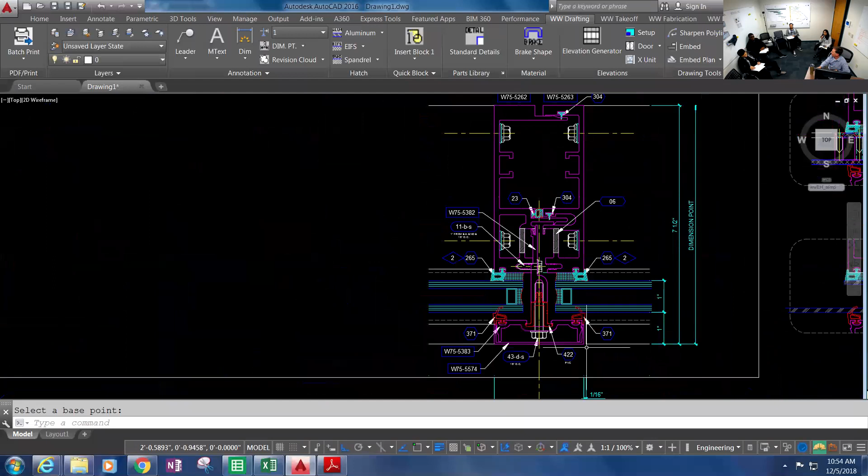And then all this out here is considered a wet area. So that's why those fasteners are stainless. Which fastener? The one holding the pressure bar? Oh, that one, yes. Those are stainless fasteners, again, for any incidental water that may get there, because those may get wet. But yeah, the moisture in the air, exactly.

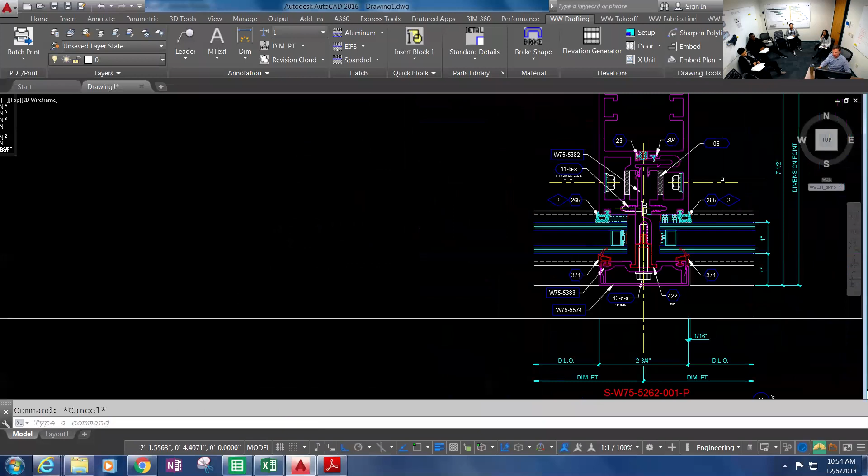Pressure equalization system. So again, that's just getting you started, just basic touching on the topics, an overview. There's lots more. Definitely Google pressure equalization or see different systems. Terracotta and aluminum panels are some of the ones that we use probably the most. Typically all of our precast products are all water barrier systems.

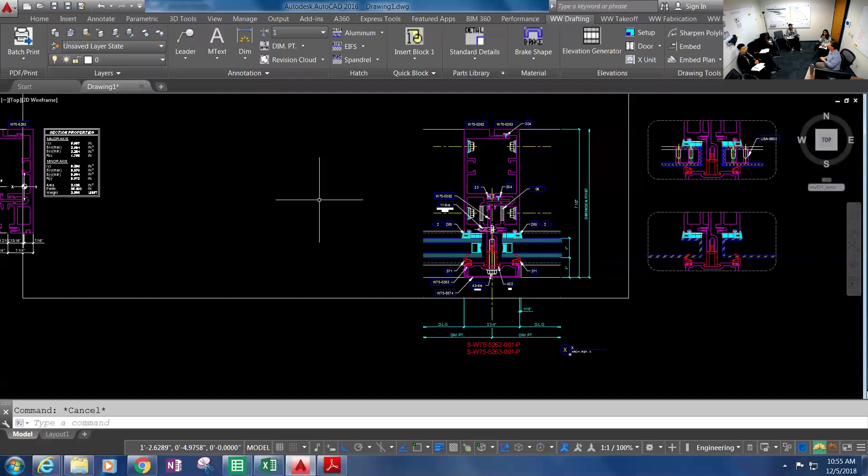If we have stone on precast, depending on what kind of stone it is, the limestone that we use out at Stanford and SCU and a few other places is not the water line. Limestone is very porous, so they stick it to the concrete, but the concrete behind the stone is actually the water line. So we have to make sure we're caulking to the concrete and not the limestone. That's not really a RainScreen system, but let's see, I can show you the detail real quick.

Right there. So it's a porous stone, and when precast lays a stone down, they pour the concrete over the top of it. There's anchors in the back of the stone, so the concrete forms around it and holds it in. In this case, the architect didn't want to see the edge, so they wanted the sealant to overlap the stone, but the true water line starts right here, at the front of the concrete, not at the stone.

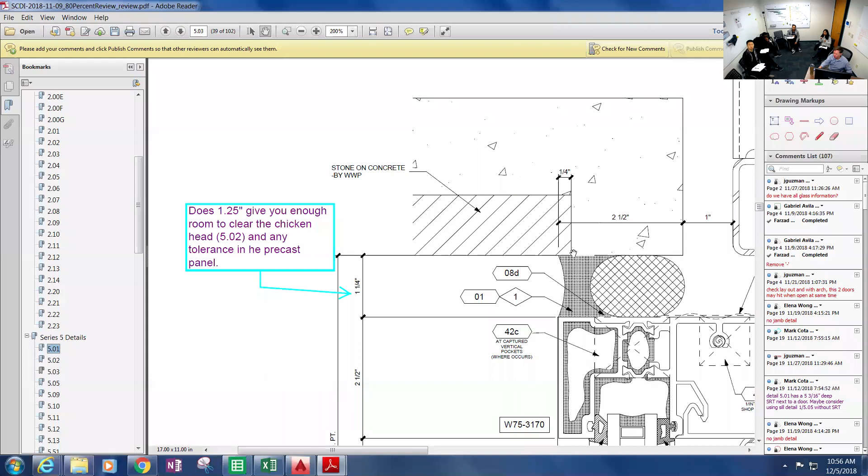So my rule of thumb, we almost never caulk to any stone finish, right? Yes, for the most part. That's true. So usually that's one of those gotchas when you see stone material. Where's the water line? It's one of the first questions: what are we caulking to? If they don't know what that material is, it's always safe to say we don't want to caulk to the stone. So you need to adjust the details like this. Usually architects don't show it.

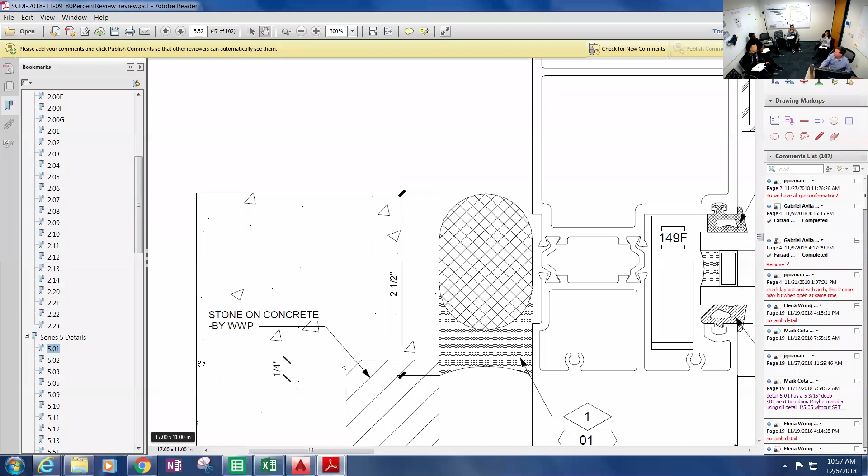Most of the stone we're seeing around here is not stopping water; they're not dense enough. Unlike marble, things like that, right? There's specific types. What was that job we're doing right now that Oscar did? MGW, that's it right there. It had some stone glazed into the windows. Oh yeah, that was GFRC. Oh, you're right, it was, never mind.

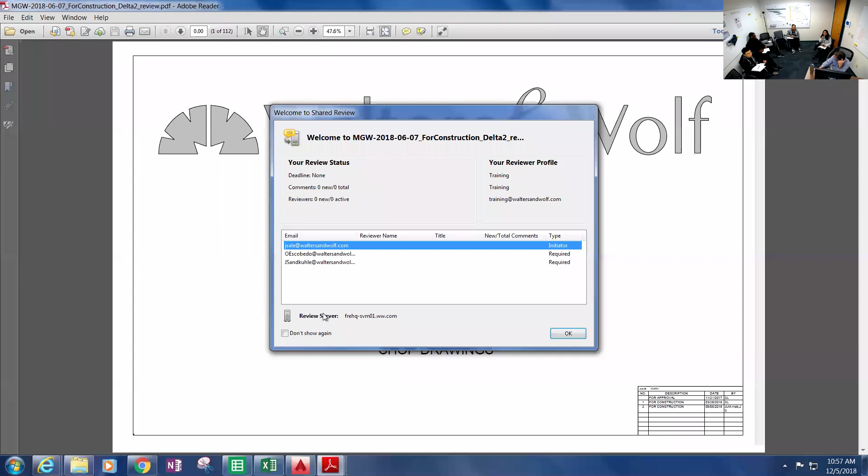But yeah, depending on what type of stone, most of the stones the architects are picking in this area for the clients are not a watertight stone, but marble is. There's other ones as well, a much denser stone. But we just don't see that product being used much in this area right now. Things come in and out of fashion, so it might come back, but right now it's not in fashion.